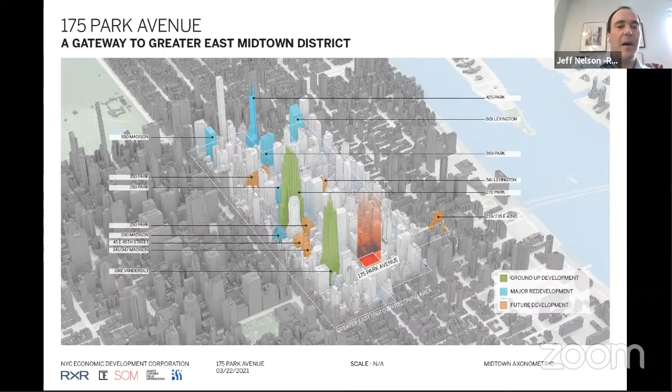On the next slide, just to touch on the history, these developments and the rezoning are really a continuation of the legacy of Terminal City, the idea that Grand Central would be a catalyst for density and growth in East Midtown and utilize the transit infrastructure and network to bring people into Manhattan's premier business district. That transit network, as you can see on the next slide, informs our approach in many ways to this project.

But you'll see how this informs our engineering and design approach, and we also took it as a real opportunity as we were approaching the site.

Looking at 42nd Street today, it's probably hard to find a location that has more untapped potential than this site. I think we all know how we got here, but just briefly, in 1980, Donald Trump reimagined the Commodore Hotel and gave us the current Grand Hyatt.

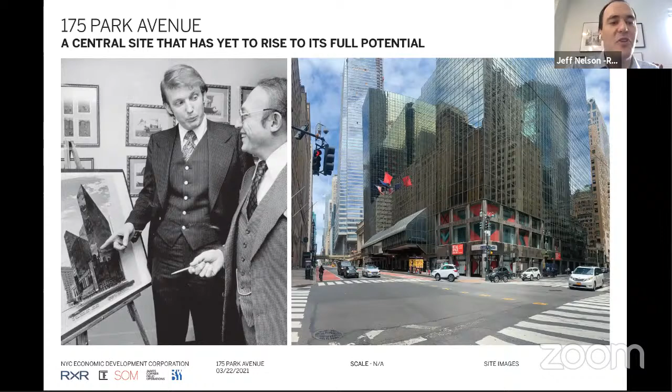The design is imposing, it's foreboding, it sits on the lot line, it cantilevers over 42nd Street, adding to that feeling of congestion, and it obscures views of Grand Central, and really has no relation to the balance of other landmarks surrounding the site.

So there's a real opportunity as we undertake this project to fix some of these interior issues as well. In short, looking at the building today, there are a lot of challenges, but there also is a lot of opportunity. So our proposed project is the demolition of the current hotel and the construction of a new mixed-use tower.

The overall program is 2.2 million zoning square feet. That's comprised of just under 2 million square feet of office space spread across 4 tiers, and then a 500-key hotel at the top of the building.

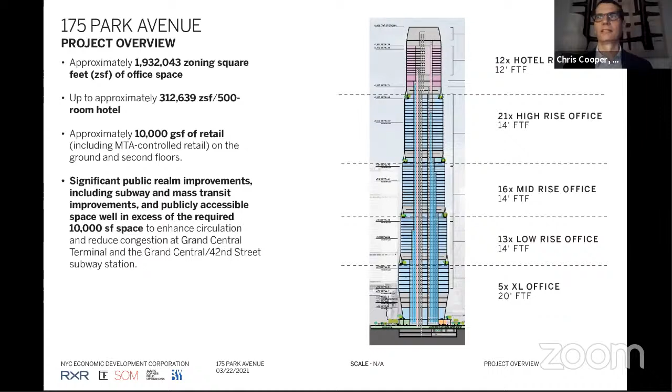Great, thank you, Jeff. As Jeff points out, our specific site enables very specific and meaningful opportunities to enhance the daily commuter experience for thousands.

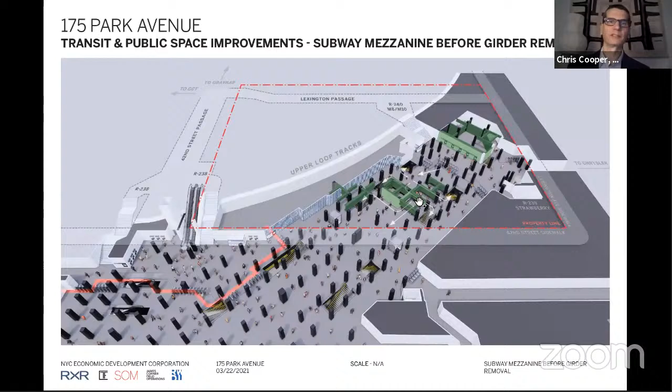As we step down to the mezzanine level, you can see that the removal of the turnstiles directly adjacent to stairs and escalators are going to dramatically open up the congested space. And then when we remove the Grand Hyatt structure above, we also remove a network of transfer girders that block the flow of the mezzanine today.

And so the result will really be a transformation of the currently challenged warren of circulation into a much more open mezzanine level.

And then from that open mezzanine level, we're creating two critical below-grade connections: one directly to the existing platforms for the Metro North Railroad, and a further connection to the shortly arriving Long Island Railroad East Side Access.

In this view of the transit hall, you can see that we're making these connections seamless to the current Grand Central Terminal experience, extending the materials, locking into the formal planning of the terminal, providing generous daylit space, and even visual connection from the corridor system up to Grand Central Terminal for much clearer orientation and even delight.

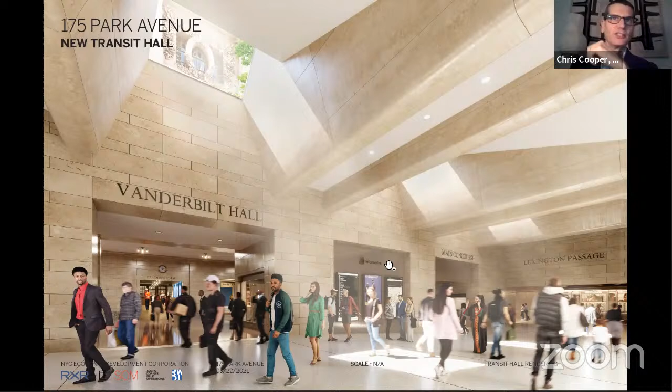So these improvements are really about a holistic approach to the terminal block. We're providing almost 50% of the street level to public realm. And they're really effective and they're possible because of our cojoined relationship to the terminal and our direct relationship to the infrastructure below the site.

So the direct relationship to the infrastructure, the direct relationship to Grand Central Terminal offers all these great enhancements, but it also is meaningful in other ways beyond the transit improvements. We recognize certainly the importance of building a new building in such proximity to a beloved New York City landmark. And this site is unique also in that it's not just adjacent to Grand Central Terminal, but it's entirely surrounded by New York City landmarks. So we believe really this elevates our project, but also puts great responsibility to build appropriately in this context.

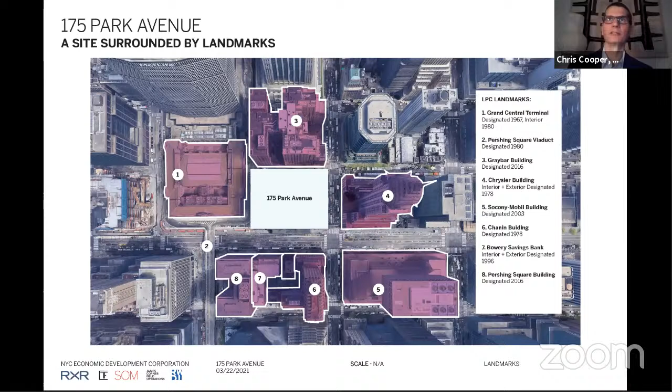So towards a goal of exceptionalism and appropriateness, we've adopted a series of design principles. The first of those is really embracing symmetry, accepting that with that comes a certain formality and dignity that's resonant with our neighbors.

Next, we adopted the classic New York City setback geometry. It addresses the sky exposure plane, but it also creates a great formal relationship to other New York City landmark towers. And it enables access to outdoor space for the users of the building, but perhaps most importantly at the base, we've aligned our first setback with the viaduct level, opening up the opportunity for a true public amenity at street level.

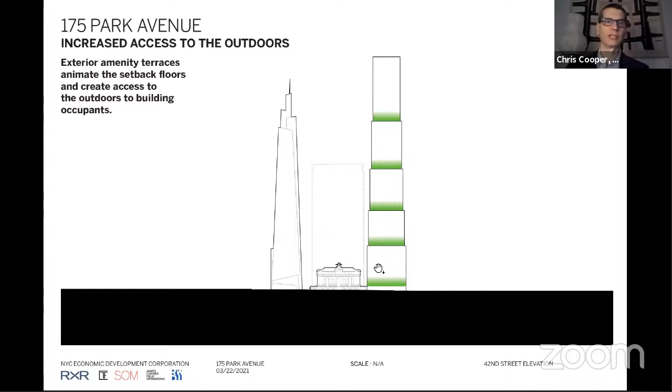And then we've taken that step geometry and draped our structure on the outside of that form. That draped structure becomes then the expression, relief, and detail for the architecture of the building, and also helps us move beyond another glass tower.

And that structural expression that becomes the articulation of the building, we gather that at the base to hit those points we talked about, the threading of the needle, really sit into the site and demonstrate the fluid flow of structural forces from top to bottom and create a base of the building. We also gather that structure at the top to create the expression of a crown.

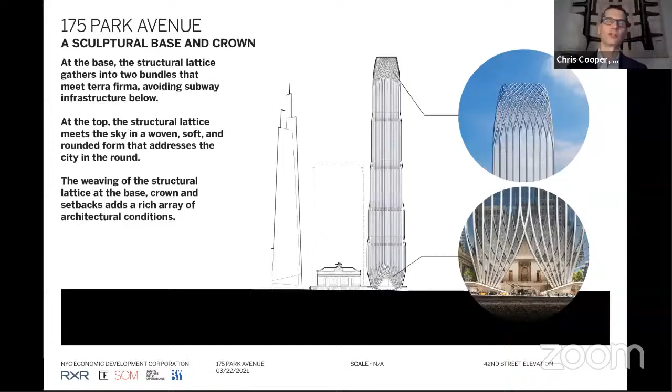So we're trying to use the expression of the building and the attributes that we're putting into the building to create an active and dynamic street level experience base, and also an active and engaging crown at the top of the building. So the premise of this really is trying to work within that tripartite approach, classic to New York City skyscrapers, of a base, tower, and crown.

The result, we believe, is a new iconic tower for New York City, one that's resonant both with New York City's Art Deco skyscraper history, but also is proudly built today and positioned to endure into the future, and acts as a gateway to the future and evolving Park Avenue corridor.

And of course, we recognize at this height, we have a responsibility, a civic responsibility, really, to stand proudly on the skyline amongst the other great New York City landmark towers. And that responsibility certainly extends down to the street level experience and how we enhance the street level experience.

And so in this elevation, we hope you begin to see this idea of a direct and intentional connection to Grand Central Terminal. We have extended the materiality and the datum and the public component of the viaduct level onto our site and created a landscape of stone that ties into the viaduct base of Grand Central Terminal, and extended that to the core of the building that relates very directly, we believe, to the scale of the Grand Central Terminal. And then atop that landscape of stone tied into the viaduct, we bring down the structure from above.

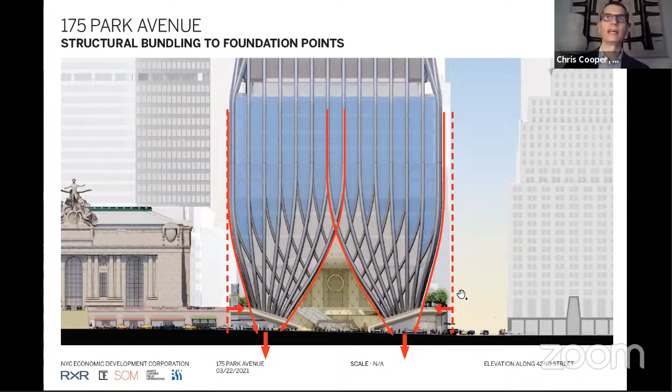And as we looked at it at a larger scale, that structure gathers at the base and plugs into the points where we're able to connect below grade between the subway tracks and platforms. It creates an expression of the structure plugging into the site, and it gives us great benefit in that we can taper the building in and create meaningful outdoor space around it.

Where we put those points of inflection and those changes in geometry are aligned directly to the landmarks on either side of us, to relate to them, but also to bring proper articulation at the scale of the street and at the base of the building.

That tapering allows suddenly public realm at the base of the building. This is such a significant attribute of the proposal, that we're able to create meaningful outdoor spaces fully encircling the building at its base.

We are primarily doing that at the viaduct level, which is also our lobby level, because our elevators do not penetrate down into the infrastructure below. So we have a new raised level at the viaduct, which is the lobby of the building, with adjacent terraces that encircle the perimeter.

That strategy of tapering at the base also allows us to incorporate sidewalk widening and increased entrance depth at each of the entrances to the subway and to the building. So there's a dramatic improvement to the flow at street level.

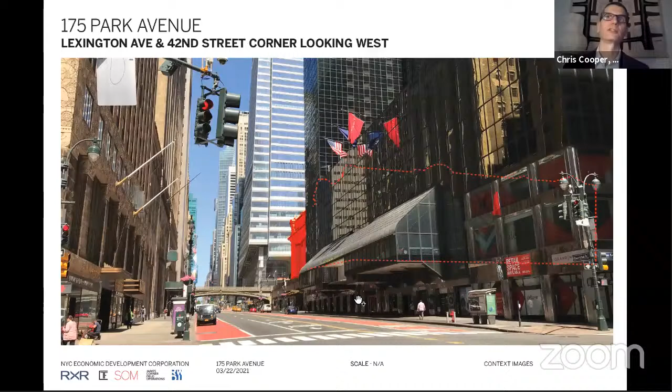This condition that exists today, which has room for improvement, is exactly the condition of an as-of-right street wall building that would replace this with a podium built to property line, which would again add to the congestion of the sidewalk and the concealing of Grand Central Terminal.

So that's what we think is so unique about this: by tapering in, by peeling in to hit those points of structure, we expose Grand Central Terminal, and we can extend the viaduct level and then invite the public up to that level.

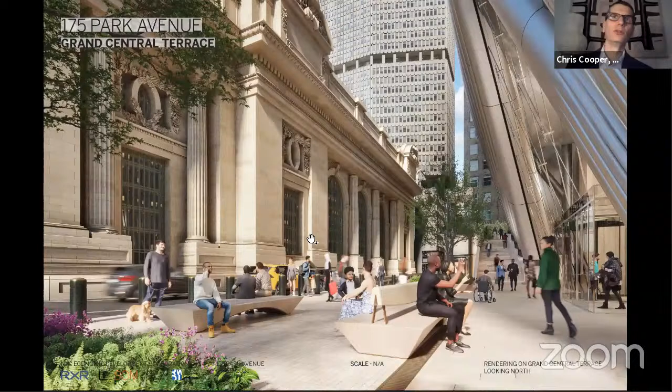Here that starts to show itself, in that for the first time we see the east facade of Grand Central Terminal as an active part of the streetscape, and we are able to see around the building and through the building to the terminal, really inviting the public up to new public spaces.

This is created space that is currently in the footprint of the existing building. The property line is just at the far edge of the bench here on the left. By tapering the building in, we're able to create meaningful outdoor space and bring the public up to see the east facade of Grand Central Terminal, which is just as grand as the south facade.

Moving around the building, we have this opportunity to create meaningful outdoor space, sunlit, with mature trees raised above the congestion of the sidewalk and street level, amongst the great New York City landmarks that surround the site.

So I want to talk a little bit about the tectonics of the base and how we arrived here and what our approach is. Diagrammatically, we've really been thinking of this as an extension of the plinth of Grand Central Terminal. As we are co-joined, we continue that, which was very much in line with the historical planning of the terminal. So we extend that materiality in the base and also in our core, which is scaled analogously to Grand Central Terminal.

And then we carve out that stone plinth to allow for the complexity of entrances and access to the subway, to Lexington Passage, to the program of the building, to the hotel and to the office. That carve also allows us to invite the public up to the viaduct level.

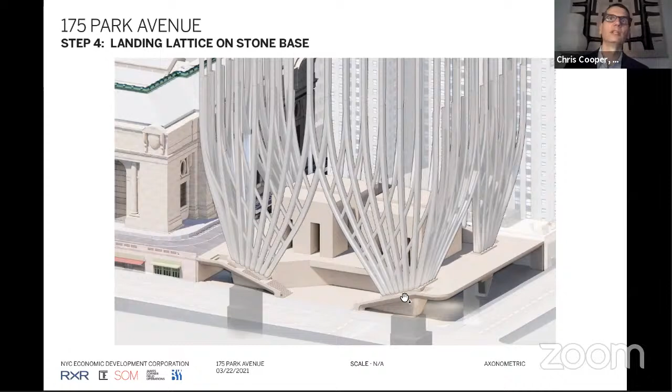Some of the specifics about what that means: we have a steel structure, an expressed steel structure, and that steel structure plugs into a concrete base. This is the transition we have to make from steel structure to foundation footing below. So there is a moment where the steel comes down, it is gathered into a concrete base.

That then sits atop the mega column that we were able to thread through the foundation below. Our approach has been to clad that in stone and to express the solidity of that base, which coincides with the points of connection for the stairs. We've taken steps to bring down the scale and texture of the columns with detailing appropriate to a pedestrian experience and to a base of a tower in New York City.

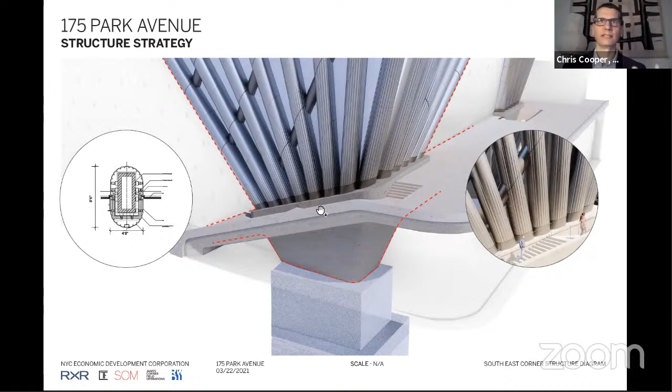And that all comes together in an image like this. You can see the condition which is unique in New York City: this idea of plugging into a raised viaduct level, but the power of inviting the public up directly adjacent to that connection, the opportunity to have this raised public space, and also to open that up at street level to maximize pedestrian sidewalk widths. There is a lot happening in a small site and small area, but it all comes together at a heroic moment like this.

As you move around the building, you start to understand the complexity of that viaduct level in relation to street entrances, in relation to public space above, and the transfer of the tower down into the base of the building.

This is an area we are very interested in. SOM has a legacy of landmark buildings with structural expression, and how one thinks about using the expression of that structure as part of the architecture. We've tried to be very intentional with how we are placing this building into the city in a way that is appropriate to New York City.

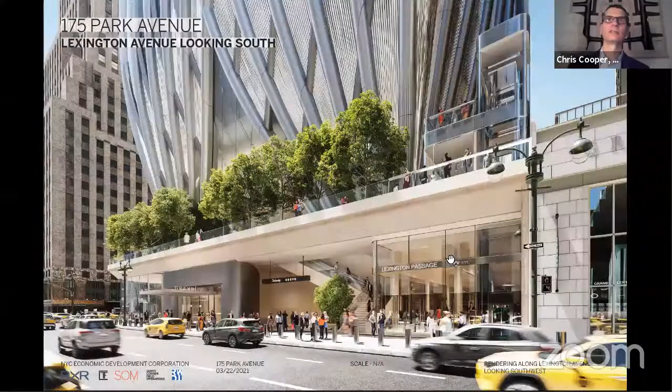Wrapping around Lexington Avenue, you continue to get a greater understanding of the benefit of the viaduct level, the invitation of the public up to that viaduct level, but also the active entrances to Grand Central, to the subway, and to the building programs below at street level.

I'll pass this on to Isabel to walk us through the details of the planning of that raised level. In this image, what we hope becomes apparent is the celebration of this section of the site, that the pedestrian experience is not just at street level, but at viaduct level, at sidewalk level, and also access to that infrastructure below grade. The idea here is to try to bring all that together and tie it into a landscape that connects to Grand Central Terminal and is the receiver for the great structure coming from above.

Great, thank you, Chris. So I will now walk you in detail through the designs of the public open spaces. To summarize again what Chris just mentioned, we envision the public open spaces to surround the four sides of the building.

The building will be encompassed by a series of three very distinct terraces. We have Chrysler Terrace to the right-hand side of the image overlooking Lexington Avenue, Graybar Terrace to the top side of the image along the north side of the building, and Grand Central Terrace along the left-hand side or west side of the building.

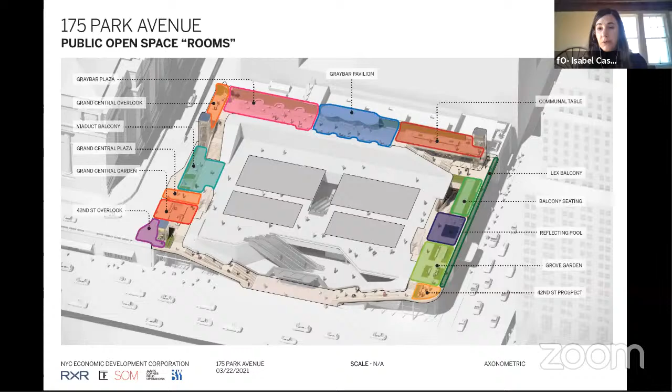These rooms will provide visitors a variety of different opportunities, ranging from social seating to seating carefully oriented to highlight key views to landmarks, movable tables and chairs that provide flexibility for those that seek sun or shade, and also fixed tables that will provide anchors throughout the terraces.

In addition to creating a variety of experiences, we also envision the terrace will be activated by a public art circuit composed of rotating temporary art located at key places along the terraces, inviting visitors up and to transit all of the public spaces of the area, ensuring there's always a level of new opportunity and interest throughout all seasons. So now I'll walk you through the designs of each one of the terraces, starting with their entry point at 42nd Street.

As Chris described, the entry is composed of a very large and generous series of twin staircases that will take visitors from 42nd Street up to the terraces. The staircases have been designed with really ample landings, so as visitors step up, they can take a moment of pause to take in the context as they rise up to the terraces.

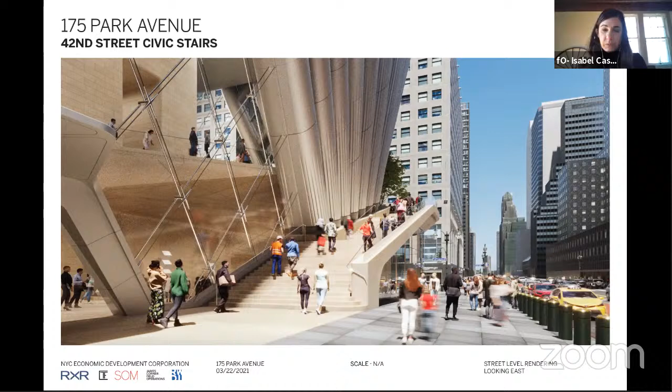The garden spaces of the terraces have also been carefully located close to the edge of the space, so the notion of seeing these garden spaces above really invites visitors from street level up to the terraces above. Starting with the first terrace, we have the Chrysler Terrace.

This terrace is the largest of all of them. It's located along Lexington Avenue. Because of its scale and exposure to a large part of the Midtown context, we envision this one as being a social space that will emphasize or take advantage of the unique views it will have to the Chrysler Building. But also because of its scale and positioning within Midtown, it will be a space anchored by a canopy of trees that will provide a sense of shelter for those that visit the terrace and also make the public space quite evident from Lexington beneath.

Looking at the renderings of the Chrysler Terrace, we're going to start walking through it from the southern corner, as it faces 42nd Street and Lexington Avenue. Here we have carefully curved the railing of the terrace to create a very inviting edge that the public can access by standing on a standing ledge with a very broad top, taking in views of this unique visual corridor. Moving further along to the north...

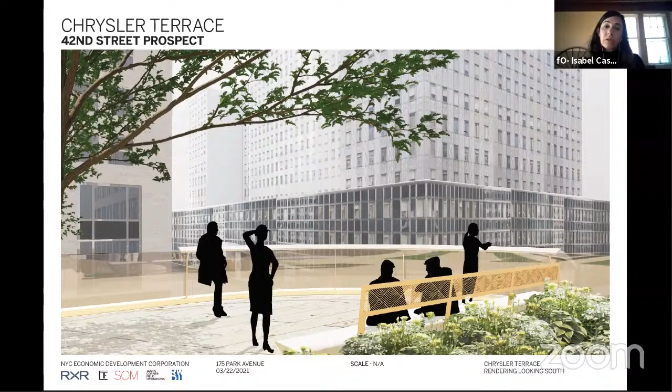Here we see the high branching tree grove that will anchor and shelter the terrace.

Interrupted in the center by a tabled water feature in alignment with the Chrysler building. Underneath the tree grove, we'll have a variety of different seating types, including, in the background, social seating with benches facing each other inboard and bound by shade gardens.

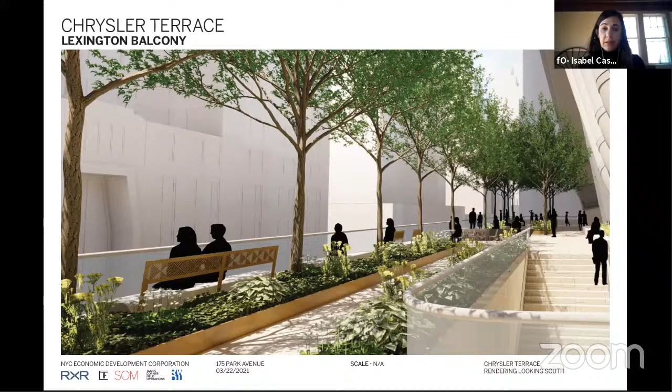Moving further to the north, we have the northernmost end of the Chrysler terrace with the staircase that will connect the subway to the terrace on the right-hand side. On the left-hand side here, we see balcony seating, where the benches have been oriented outward, taking advantage of the views down Lexington Avenue and the Chrysler building.

The northern end of the terrace will be anchored by a retail space that will hold a cafe, but also the elevators that will connect street level to Chrysler Terrace and Graybar Terrace above, which we see on this image having a balcony-like relationship to the Chrysler Terrace. All the way on the left-hand side of the image, we see the staircase that will take us up to Graybar Terrace. Graybar is located along the north side of the building, as I mentioned originally.

It is the space that will connect both terraces on either side, so we see it as a dynamic connector that will be activated with a retail space, a concession stand, but also as a space kept quite flexible, so it can accommodate large pieces of artwork as well as cultural events.

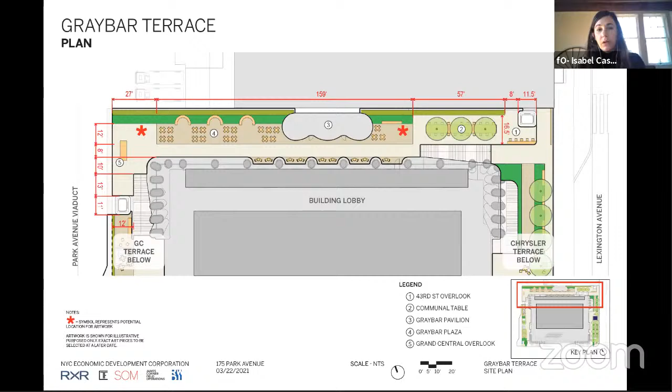We have located two permanent seating areas on either end of the terrace, east and west, where they benefit from great views to the adjacent iconic context. We envision activating the center of the terrace with a retail pavilion that will operate all year round. Looking at the renderings of this space, this is its easternmost edge overlooking Lexington Avenue and the Chrysler building, but also having that immediate direct visual relationship to the Chrysler Terrace beneath.

The center of the space will be activated with a retail pavilion that will operate year-round and will offer indoor and outdoor seating as well. The retail pavilion is intended to be quite transparent in its architecture, so it still permits clear views out to the Graybar building behind, which makes this terrace so iconic.

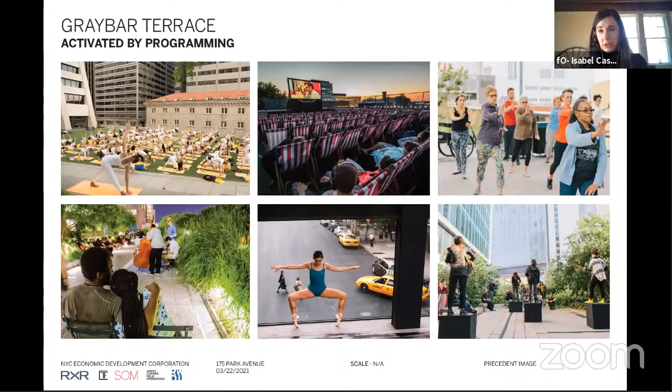The intent with this space is that it can become flexible, accommodating a variety of different programming, ranging from fitness classes during the day to other cultural events later in the afternoon or at night. Because of its flexibility, it can also accommodate different types of artwork, whether traditional sculptures or more experiential pieces, such as this one suspended from the space above.

The last terrace will be the Grand Central Terrace. As you all know now, this one is located at the same level as the Park Avenue Viaduct, overlooking the eastern facade of the Grand Central building, and it is the smallest of all the terraces. Therefore, we envision it as more of an individual space, a place of respite and lingering with smaller scale types of seating.

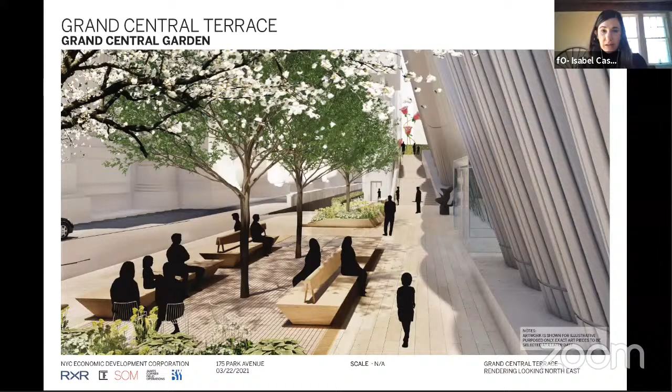Looking at the next slide, here we see the benches as they're oriented in different ways, and the entry to the building lobby behind with a flush plaza that would allow visitors clear views of the Grand Central Building.

Moving to the next slide, now our back is to the Graybar Terrace staircases. Here we see that northern space activated with movable tables and chairs and lined with a hedge that will screen views of the roadway of the viaduct.

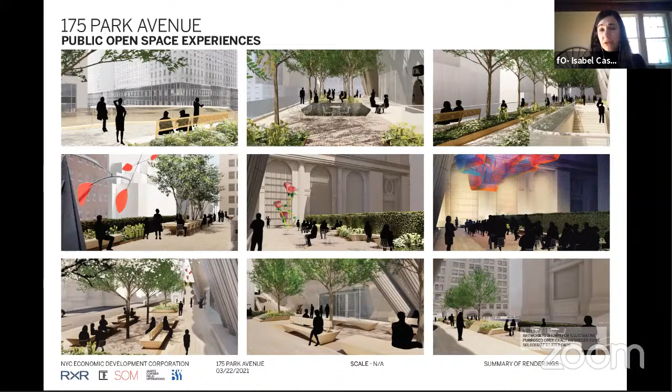In summary, we're looking for all the terraces to provide unique experiences and different types of social opportunities, all oriented towards the unique views of the context that the elevated spaces will offer, but also seeking to create a unifying design vocabulary with materials like limestone and bronze, which are persistent through the context, and textured shade planting. Lastly, artwork will add an additional layer of interest to the terraces, changing on a temporary basis to draw visitors up to this unique space within Midtown.

I will let Jeff make some concluding remarks. If someone can unmute Jeff.

Thank you very much. We're really excited about this project, and we hope that came through in the presentation. We've given you a sense of how thoughtful we've tried to be with every aspect. Just to conclude, as I said at the beginning, we really think this project can be a game changer for Midtown Manhattan. This is a site that today has so much untapped potential, and there's an opportunity to contribute to the transit, the broader public realm, and to the recovery of the city. So we're very pleased to be here and to continue our engagement with you and the commission, and are, of course, happy to answer any questions.

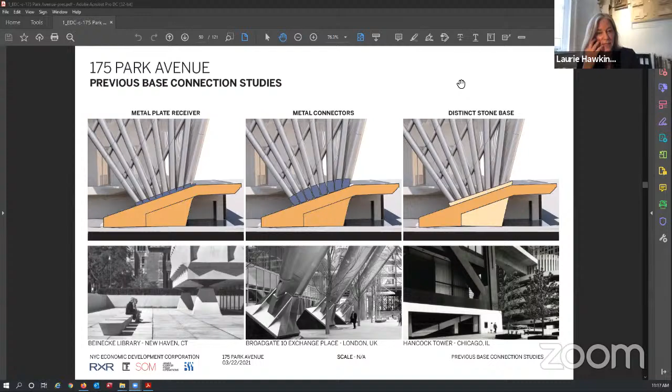I think the first two are great examples. The Hancock just kind of goes into a chunk. But on the terrace on the west side of the building, I'm trying to think of the name, but I just got a glimpse of that. I don't know what slide it was, but there was a very large plinth exposure, actually exposure of the base of the column. So you're articulating that condition where the thinness, the translation of the viaduct level becomes this thin skirt piece, whatever you want to call it, which I think can be very elegant. So two things, when it comes around, there were these three examples, which I think are great. The Beinecke is very heroic. So I guess it's in the landscape presentation where you're on that terrace, but what is that terrace called?

I think this is the Grand Central Terrace that you're referring to, on the west side. And then there's, if you keep going, there's a place where the structure exposes itself, where the columns are - this big gray bar here laying on the ground.

What are you going to do there? It seems like a question - are people supposed to sit on that? What is that piece? Maybe it's fine, maybe it just is what it is. I'm just interested in how that resolves, because you have this elegant landscape resolution, and then you have this chunk. Just wondering what's happening there.

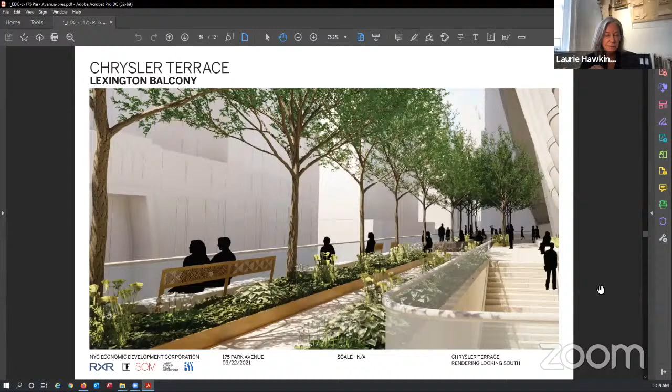I also wanted to point to this specific moment where the viaduct - that would be on the facade we looked at last time - where it meets your facade, and that point of continuity, that contrast of new and old, which I think is great. But it was done so poorly previously. So when you're on the ground looking across the street at the two facades, the viaduct level and your base coming together, obviously there's a big reveal and a control joint, but I'm interested in how that gets articulated, because that's a really important moment in the project.

Thank you. But anyway, I think it's progressing nicely. Do you want me to respond to either of those points, Laurie?

Should I pause? I think these are just elaborations on what our comments were, but the one on the Grand Central Terrace I just noticed for the first time, so I wanted to call that out. And maybe that's something you're going to look into.

That's all. Okay, I'd like to add my support to Laurie's comments. I think the presentation you guys did today was terrific. The building is definitely moving in some terrific positive directions, but particularly grateful for the views of the building from actual streetscape as opposed to semi-helicopter views. It's lovely to see that when you take people to the street, the building looks pretty damn good. So that's great, and those are relatively new, and I thank you for providing that, because that's what a lot of people will see.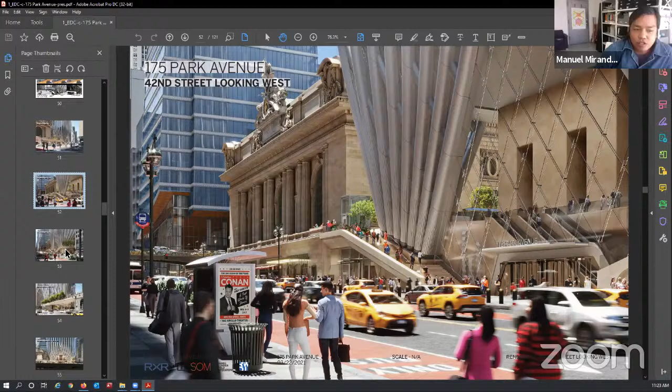I'm looking at page 52 in the presentation. I think that's a great rendering that demonstrates how this new space continues the sort of language of Grand Central, with the signage. I used to go through this space before the pandemic weekly to use Metro North, so for me this is totally welcome to see. I'm sure it'll be great benefit for everyone using that. I think in this rendering, there's a good example of how the agency signage or branding of Metro North and the signage or look of Grand Central go together well.

I did have a question about page 54. I think this is also a good rendering to study. You have the branding for the hotel, the signage for the subway system, and then the signage for Lexington Passage. I usually enter through the 42nd Street entrance, but I also sometimes enter here, and I always get the sense that this is a passageway through the existing hotel, but when I'm in this passageway, I feel like I'm in Grand Central. So my question is, when you're looking at this interface with the building, is it clear that once you enter through those doors, are you in Grand Central, or are you part of this public-private space, or part of the building? That's more of an open-ended question, and I'd be curious what your response is or how you're thinking about that. But that was just one thing I wanted to notice or highlight.

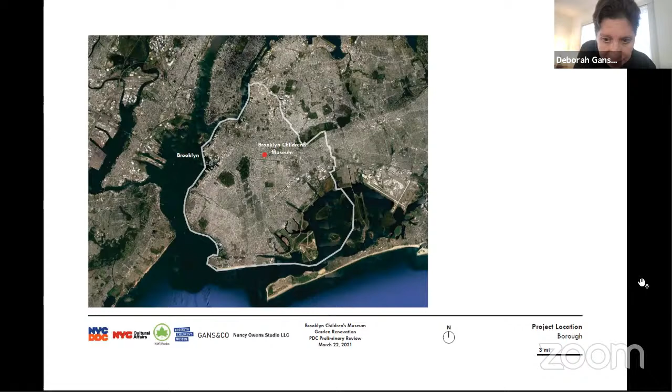Grace, I'm not controlling it, it's not advancing. Is it on full screen PDF? It's not advancing. Oh, there it goes. Here, let me see, can I move it? I don't seem to be able to move the slides, the images. Sorry about that, I went to the bathroom.

Okay, let me try and restart this share. Yeah, I think we had this issue when we practiced too. Okay, let's see. Nope, okay, well why don't I advance it for you? Okay, so can you go back, just let me, oh I wonder. Here, now it says you're controlling my screen. Why don't you try again? Try your mouse or the keyboard keys. Okay, what is this? Nope. Okay, well why don't I just do it for you, and I'll control it for the rest of the time, everyone will excuse my next steps.

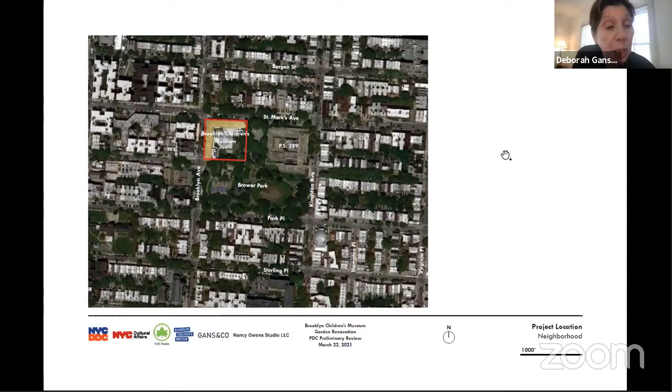So, okay, this is good, we'll start here. Our site is the green L at the rear of the yellow museum that completes the square. As Stephanie said, it hasn't been an exhibit space, but it did provide public programs as well as a garden from the late 1970s, when the first phase of the museum was opened, until 2013 when it was closed because it was unsafe, and it's been closed since then.

Our second task, and you can keep it here, thanks, is to improve this courtyard by expanding its accessible public space within a sustainable environment that will support the museum's earth science exhibits. And this is a great place to stop.

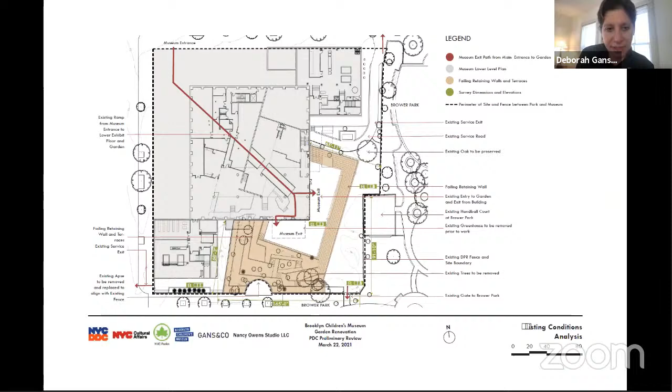So the next, please, and we can stay here for a bit. So with our collaborator from the beginning, we've collaborated with Nancy Owens Studio. We use the landscape itself as the retaining structure. We use stabilized planted slopes as our primary structural means, and they of course also provide water management.

You see here how those slopes are then traversed by accessible paths and ramps that open onto terraces. And those terraces are sometimes shaped and protected by retaining walls, which are carved into the slope.

Thanks. So this is a diagram of the primary accessible loop, circulation loop, which is in green, so that all the major exhibits are extensions of or part of this accessible loop, and they're also accessible. Then what we've done is across the garden, we've also connected them through sight lines.

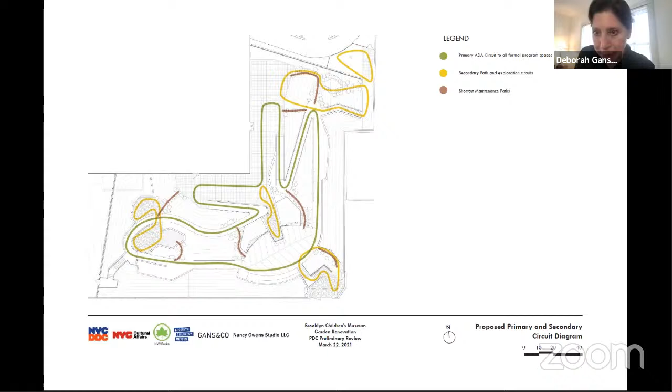You want to go to the next one? Yeah, because I think this is a very good way to see how this all works together in relationship. All these paths and places work together in relationship to the slope.

I should say that in this whole process, we spent a lot of time talking to Robin Moore, who was our consultant. He's a child's garden expert who brought us Teardrop Park and worked on that, as well as many other beloved spaces. But the thing I want to show here is also the different characters of the space, meaning on the south, which is the right, it's wider, gentler, it sponsors a path rather than a ramp that opens onto spaces to either side of it, while on the north side, which is on the left, it's much narrower. It is traversed by a windy ramp that opens onto what we call the North Slope climbing, the moraine.

And then could you go back one second, Grace? Thank you so much. So on the central terrace, the other thing I want to bring your attention to is it looks down on the crevasse, and the crevasse is an important feature because for kids who can't scramble up slopes, it's a universally accessible way to experience the dramatic section of the garden, and also a way for all the kids to really enter into a cut into the earth.

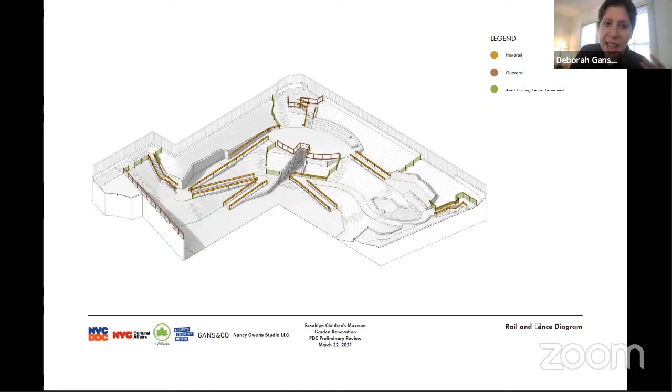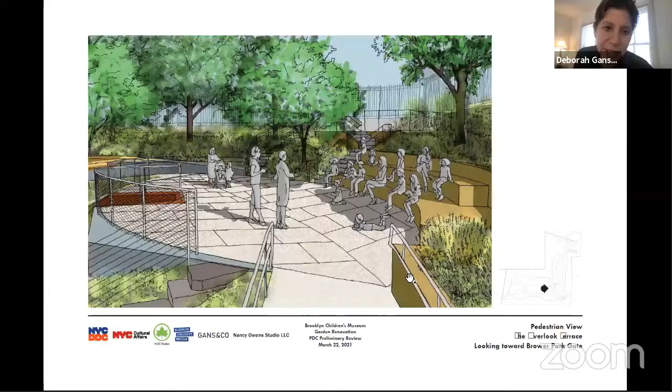And so then the next several slides, which Grace can just flip us through, are views that show how all these elements work together to do two things, which is to create an integrated retaining structure, but also simultaneously an armature for the earth science garden, which is geological and also a matter of the flora and the fauna.

And if you go to the next slide, Grace, I'm going to have Nancy Owens speak to the flora for a minute. Hi, Nancy Owens, and thank you, Deborah.

So just go back to the previous slide. I just wanted to say that we use the planting to further articulate the garden spaces and program areas where the plants masses create volume and canopies, and also create a hierarchy of scale with the trees and the understory and the ground covers.

Next, we use the plants to also create a sense of enclosure for this earth science universe. Screening out the unsightly areas such as the handball chain link fence and some of the service areas, while still allowing a visual connection between the museum garden and Brower Park.

We have used all natives here, pretty much, reflecting the diversity of New York State's different plant communities, which also support the museum's educational science programming. And they're also integral to slope stabilization. The plant species are low maintenance, primarily deciduous with some evergreen shrubs, and the planting design provides seasonal color and interest.

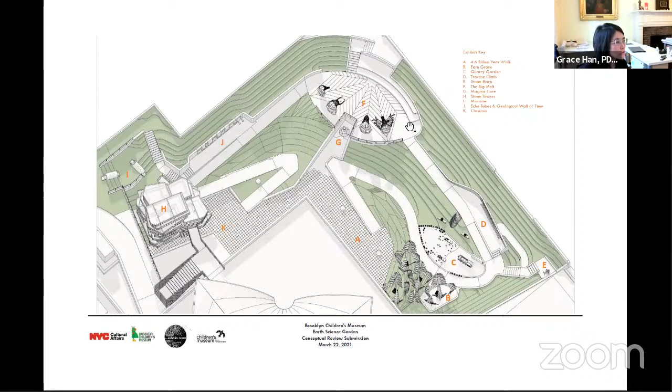All right. Hi, everyone. So it's my excellent job to be able to bring you what folks will be doing in this beautiful garden. So I'm the exhibit designer. And in the interest of time, as we get closer to lunch, I will just breeze through each of these exhibit areas, really holding back some of the pedagogical and philosophical decision-making that went into each of these things. Certainly, if you have questions about it, we can talk about that at the end.

Next, we're looking at how the exhibit components are laid out in an activity gradient to encourage self-regulation. On the left side, we have our big body, exuberant, sweaty, rambunctious play exhibits. On the right side, we have quieter, calmer areas of refuge and respite.

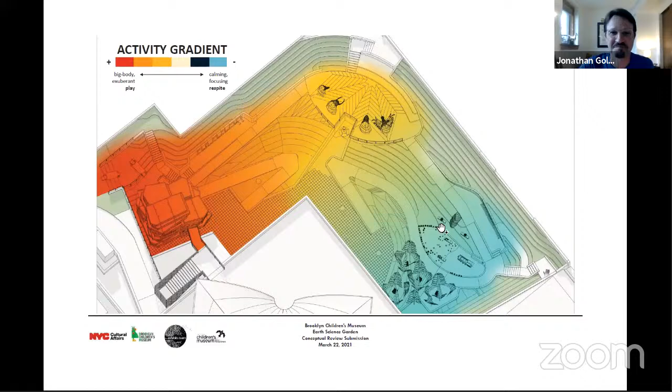Next, we're going to look at each component, beginning with the 4.6 billion year walk. This is an annotated walkway extending from the building to the geological wall of time. The length of each path segment corresponds and is proportional to the lengths of time they represent.

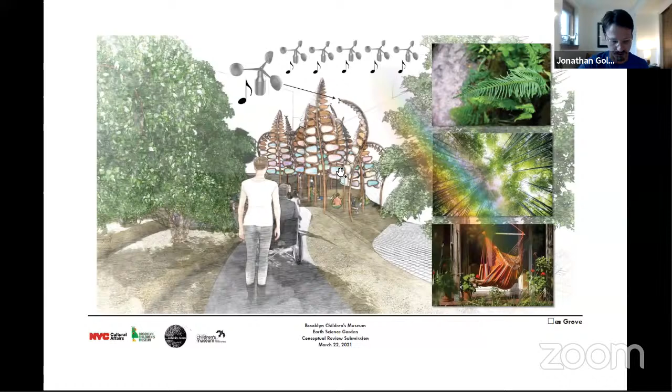Next, we're looking at the fern grove, an artistic interpretation of prehistoric megaflora which may have existed in the Brooklyn area during the last ice age. In the fern grove, you can snuggle and gently swing in hammock chairs. When the wind blows, several wind turbines will spin, producing gentle, soothing musical tones. As the sun tracks across the sky, prismatic lenses will cast rainbows all around you.

The next two exhibits are the traverse climb and the stone harp. You could think of the traverse climb like an extra wide balance beam that shares this wall, featuring adaptive handholds, easy to grab. This component is intended for our youngest climbers, as well as being a more accessible play invitation.

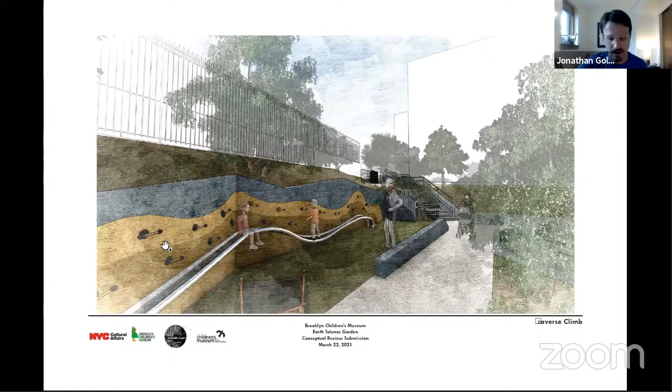At the top of this staircase, there's what looks like an otherwise mute or inert stone obelisk. But upon closer inspection, when you use the mallet, the stone harp plays these beautiful, almost mysterious musical tones.

The next exhibit is the Big Melt, which features four of Brooklyn's most famous Ice Age megafauna. Individual water geysers are situated safely within each sculpture, allowing guests to pressurize and launch the geysers skyward. The amount of water is actually pretty small, but the effect is impressive. Fogging water nozzles complete the dramatic setting, wrapping guests and the sculptures in a veil of mist.

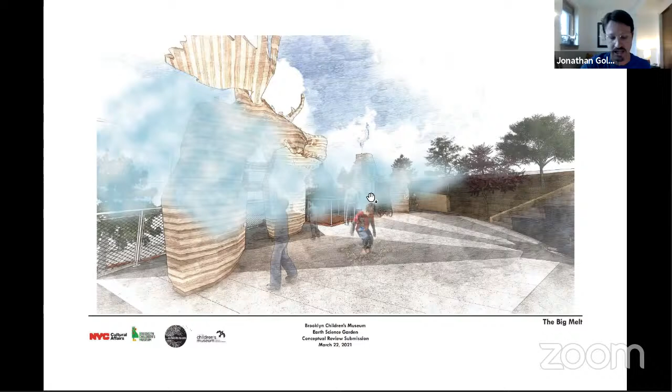Moving on to the crevasse that Deborah was talking about, where we have the magma core, a whimsical interpretation of the Earth's core. Here, guests may grab pebbles at the base of the core and drop them through a perforated sculpture. As the pebbles fall, they cascade through internal steel pins, resulting in musical notes. As an added feature, at the sculpture's base, guests can rake and broom the pebble bed. This is a super low-tech feature that we've had great success with on past projects.

Now we're moving on to the stone tower. This is an inhabitable climbing structure, and I say inhabitable because, unlike a climbing wall, guests are climbing safely within the interior of this structure. They're not strapped in with a rope or on belay. Guests climb through the structure by moving from platform to platform, such that the farthest one could fall would be a very safe 28 inches, give or take.

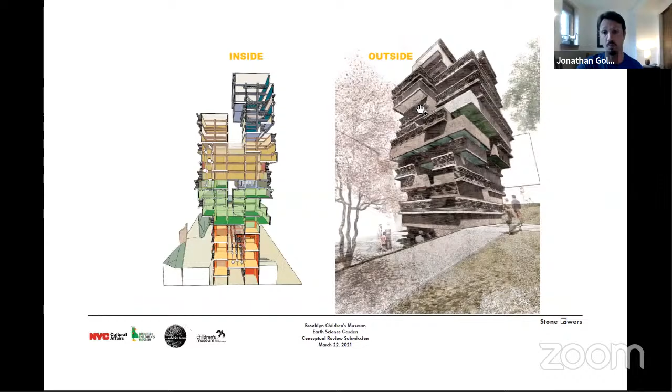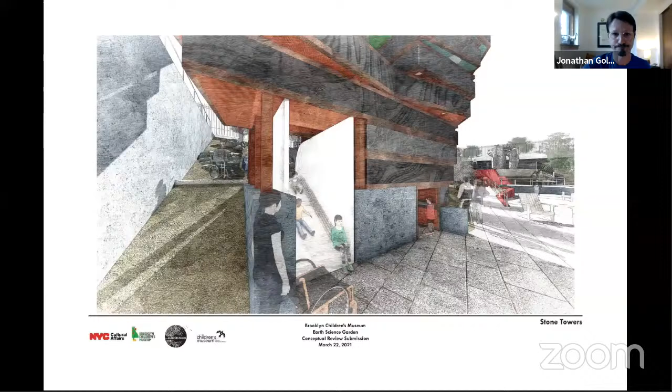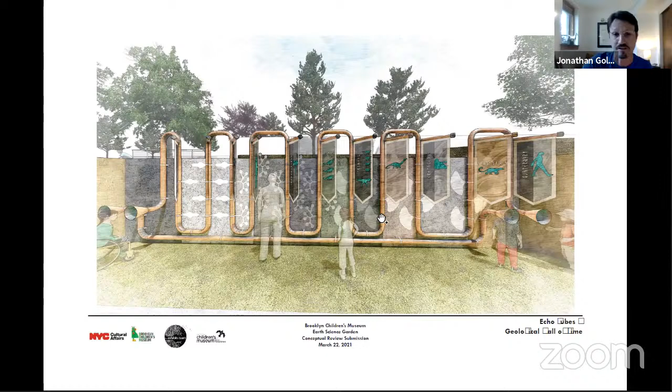demonstrates the last 650 million years of life on Earth. Lastly, in an effort to make some tacit connection between distance and time, we have two separate speaking tubes, a short one and one that's three times as long. Sound travels faster through the short one than the longer one, so the overall acoustic effect will be similar to that of an echo.

That's all the major exhibit components within the garden, and the next steps really are to take a closer look at each one and decide exactly how it's built and how it will work. Here's a nice last shot of the entire garden with all the components in context. That's it. Thanks.

Jonathan, I actually felt like I was in the garden as you described those experiences. That was really beautiful.

I guess when we were looking at the plan, you did mention that this is for slightly older kids, but I would still imagine those children are accompanied by an adult to the museum. I just wondered, it seemed to me that the amount of seating that had been there previously has been reduced. Am I reading that correctly or not?

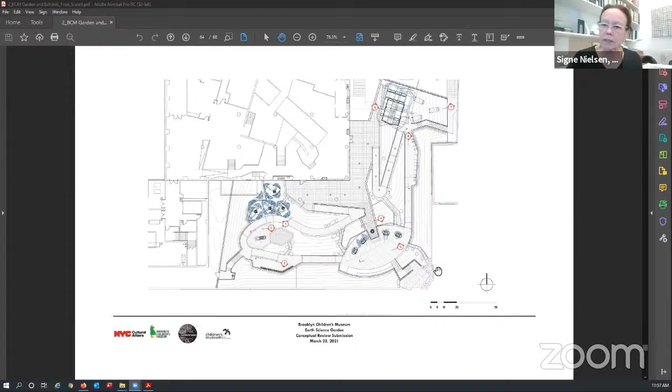So I have one more question, which is sort of a philosophical one. I think these exhibits are so exciting that I almost want it to be all kids - I kind of want the adults to just go down there, hang out on those chairs, and leave the kids alone. But philosophically, and this is probably a question for the museum too, is there any adult interpretation, or is this really something the age group you're targeting can experience without any adult intervention?

I'll give a couple pieces of context, and then Jonathan can speak to that too. The whole museum is intended to be child-directed. We've aspired throughout the museum to create a space where children are leading and the adults are following, and there does not need to be a significant amount of adult interpretation.

I think in this space there may be some interpretation needed for younger children, but really our goal is that this space is as self-directed as our other spaces. And I didn't make that up - 120 years ago, Anna Billings Gallup, our first executive director, set that as the philosophy of the museum, and it has remained so.

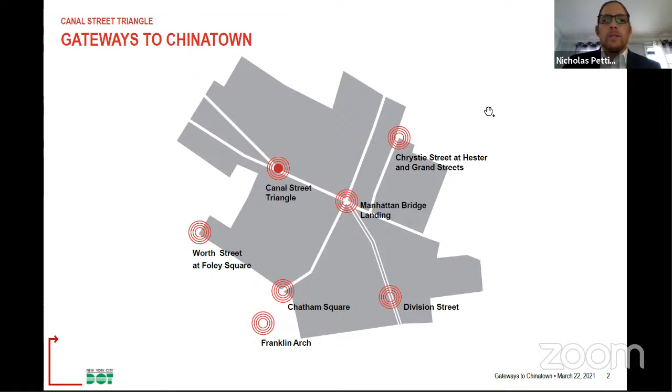Good afternoon, commissioners. My name is Nick Pettinati from the New York City Department of Transportation. I'm joined by my colleagues Neil and Karin, also from DOT. We're here today to present the preliminary design for our Canal Street Triangle as part of the Gateways to Chinatown program. There are a number of other gateways we continue to look at and work with the community on, but we're going to focus today on Canal Street.

We had last spoken with the commission in December at a conceptual level. You may recall we presented three conceptual options at that time, and really heard from the commission that option 2, what we were calling the Bosque option, was the most successful and preferred. So we've really tried to run with that design and further it, as well as take it through community reviews and quite a lot of stakeholder engagement.

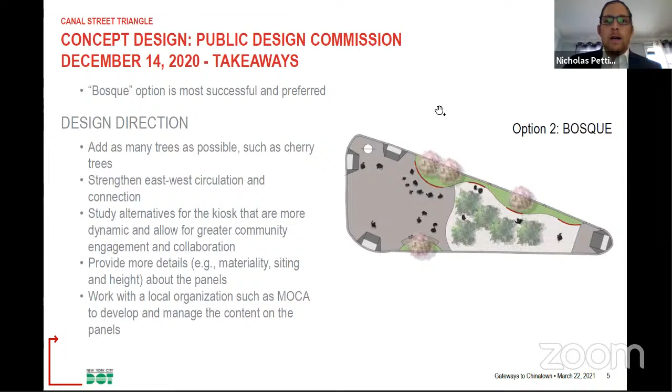The really big focus here was on preserving the existing ginkgo trees on site. I think Signe made the comment these were one of the iconic pieces along Canal Street, and they really do speak for themselves. So we've really tried to focus on making sure that those can thrive and succeed.

A number of the comments we've heard from stakeholders is really wanting a buffer from Canal Street. Obviously it's a very busy roadway, so we've continued to refine that buffer along the edge. We've added two additional ginkgo trees here to fill out that bosque. And then around the existing ginkgo trees, we're looking at creating smaller circular tree pits at three-foot diameter with silvacells below a permeable pavement surface. The goal is to make sure those trees have as robust a growing environment as possible, while still allowing for pedestrian circulation through and amongst them.

We think this is really one of the key design moves to facilitate east-west circulation through the space. Then we get to the wider part of the triangle. This is really more of the active side of it, where we imagine more of the tour groups, smaller group gatherings, and performances taking place. This again still allows for that circulation to move through the space.

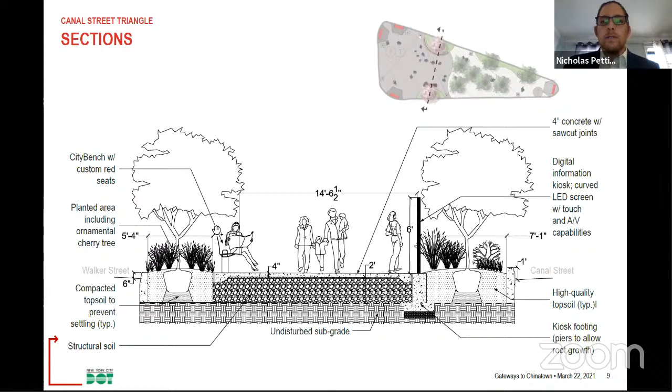Giving folks a bit more detail now that we've gotten into the weeds — this is a section cut through the larger space. You can see the two planting beds that flank either side of the triangle. We're looking at standard concrete sidewalk here, but underneath would be structural soil, providing additional volume for the trees to grow. We have that buffer along Canal Street as well as Walker, seating with the city bench, and the digital information kiosk here on the right.

We had an on-site visit with the Parks Department in January. It was one of the coldest days of the year, but we got them out there, and I think at a conceptual level they're supportive of this approach. Following this hearing, we'll engage them in their more formal review and approval process. But we think we're on the right track in terms of balancing tree health and preservation, adding new trees to the site, and preserving circulation.

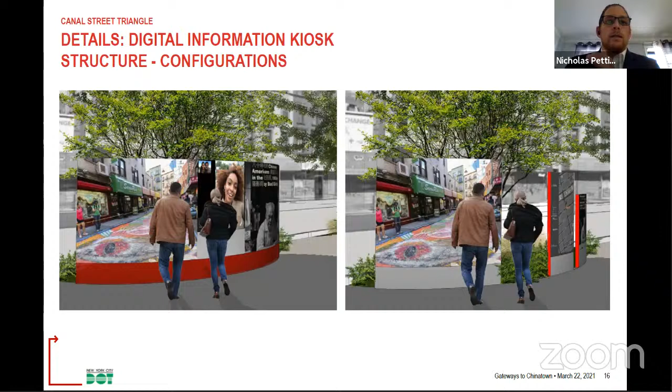As I mentioned earlier, we're still thinking about what the configuration of this screen or screens looks like. There are pros and cons to both - the visual impact of a larger monolithic structure compared to breaking it up, from a maintenance perspective and also a potential content and programming perspective. Having multiple screens also allows some visibility through the site to the plantings and to Canal Street. I think we're happy to have this discussion in more detail, I don't want to dwell on it too much here. DOT's preference is leaning towards the multiple screen configuration, just because from our discussion with product vendors, as well as overall potential for maintenance and programming opportunities, we see that as slightly more preferable - but both definitely have their merit.

We've also been spending a lot of time thinking through what the content of these will look like, and this breaks into three main buckets. I want to be very clear that in no way are we expecting this amenity to support advertising. This is designed and will be regulated by DOT as an amenity structure intended for neighborhood programming and content. That said, we recognize that it's going to take funding to maintain this type of infrastructure. So we have similar examples where we look at a sponsorship model, where a company can provide financial support and be allowed to put their name or logo on the structure, restricted to no more than 10% of the total area. Given the potential for rotating programming and content, particularly associated with art or cultural exhibits, there may be an opportunity for sponsorship of those exhibits, similar to how a museum might operate - but that's still very much up for discussion. Our goal from the DOT perspective is to make sure the infrastructure we're putting out there is ultimately sustainable, can be maintained, and can be supported by the local partner.

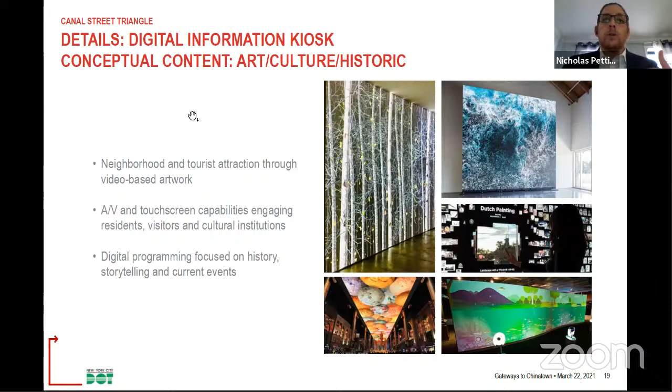So we're excited about this development. Obviously we recognize there's a lot that goes into this. We're happy to discuss it in much more detail, but we do see this as a natural evolution in this space, and something that can really deliver on what we heard from the community as well as the commission at the conceptual level.

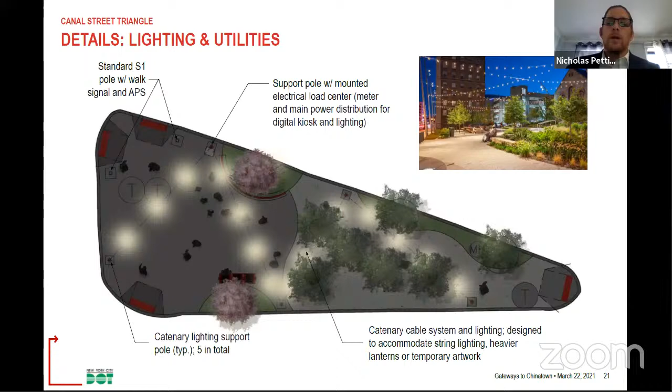Lighting is obviously a key aspect of this site. Looking at the catenary system, I think a simple string light will be the baseline proposal, and having that run through the site will be a really nice nighttime effect, particularly in concert with the trees. But there's also the opportunity to do more custom light features on a rotating basis. There's obviously a huge number of examples of different kinds of lanterns already expressed in the neighborhood, and how that can evolve is also very exciting in our minds.

This just gets at some of the details. We've been looking at a number of manufacturers and vendors that specialize in the cable system needed to support not just the string lights, but also heavier pieces of infrastructure. Ultimately, in the bottom right, we're trying to be cognizant about what the utility infrastructure will look like on site. We'll need an electric box that houses a meter so the electricity on site can be paid for, and we're looking right now at mounting that on one of the catenary poles so we're not taking up any planting space or valuable circulation space.

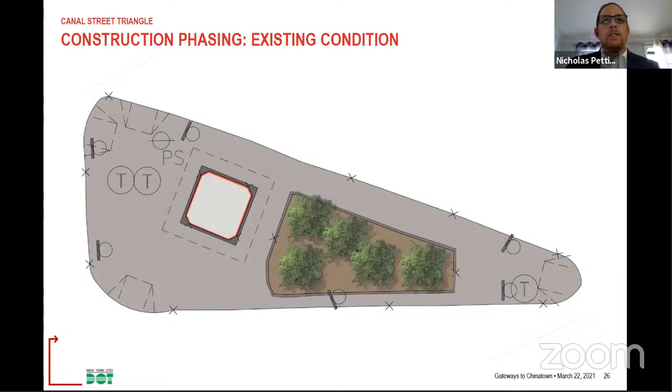So we're trying to be cognizant of all the different scenarios. I think we're confident that we will be able to get the full funding we need, but if we can't, we do think there is a way to phase this.

We could deliver some of the circulation improvements on the eastern part of the triangle with the permeable pavement, preserving the trees, introducing the buffer, even introducing the first part of the catenary lighting system while preserving the existing kiosk. Given there's been a lot of discussion in the community about the important functions that provides, this is certainly not ideal from our perspective, but we think it is a workable first phase.

We're very pleased with how this design has evolved, particularly given some of the contentiousness we saw with the community and the previous proposal.

We were able to secure unanimous approval from Community Board 3, which was very exciting. We received very nice comments from Community Board 1, and we've continued to have very productive discussions with the Chinatown Partnership, who will ultimately be our partner in maintaining this space, as well as the cultural institutions. That was one of the recommendations coming out from December.

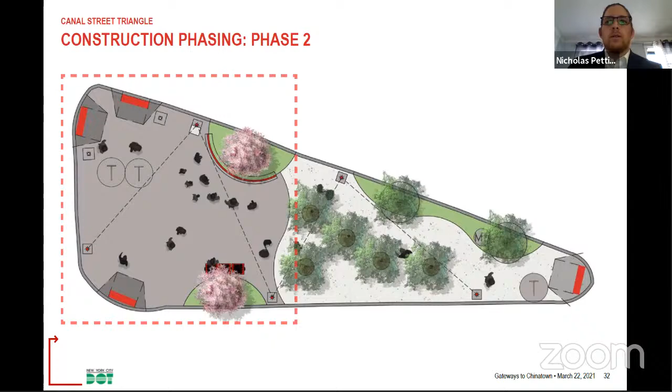So with that, happy to answer any questions, or if there's any public testimony, happy to address that as well.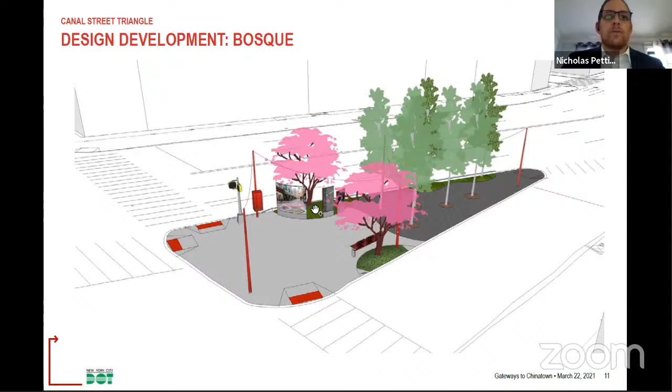Yeah, no, Commissioner, I think those are all fair points. I will say, from the equipment perspective, we are thinking that a majority of the electric and utility hookups will actually come into this box that's located on the pole. And then the equipment for supporting the screens themselves will be mostly in the base, so there won't necessarily be a huge impact there. But again, that's something that as we get into the further detailing of that, we will be paying very close attention to.

We are trying to envision the view coming across here as the screens themselves being mostly screened by the planting, and that experience being something that you have. And that's one of the other reasons why we liked the multiple screen setup, is it does allow that sight line through to the actual triangle behind, and sort of breaks up the amount of space that might be attractive to undesirable uses, whether it be vandalism, graffiti, yada yada. But we are trying to pay very close attention to that.

And certainly from a technology perspective, I think we've seen products that allow for these kinds of dimensions, but that's definitely one of the things we're trying to be very mindful of. On the brightness question, I think we are looking more at LCD screen technology as opposed to LED. That's something that evolved fairly recently after more conversations with vendors. Most of the LCD products we've seen have the ability to control that level of brightness. We would imagine it would be very low at early morning hours where you don't have a lot of traffic, so there's an ability for it to be variable. And then, obviously, the content management piece is going to be really key. We certainly understand that aspect and are working that through.

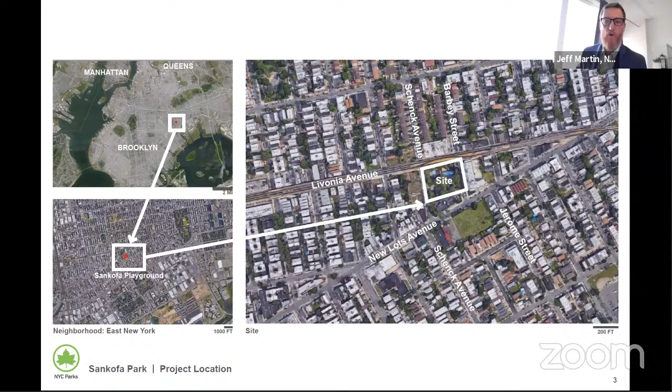The site is located in the New Lots section of Brooklyn, just south of Livonia Avenue, between Schenck and Barbey. I'll skip through some of these site analysis slides pretty quickly, but we're out of the flood zone, out of an MS4 area, and mostly surrounded by one- and two-family residential, with a library just to the south of our site - the New Lots Public Library. We've been working closely with them as they're also going through a renovation in the area, so we're working closely with them to create this cultural hub, an area that would be connected. Both spaces would be connected as they share the same lot.

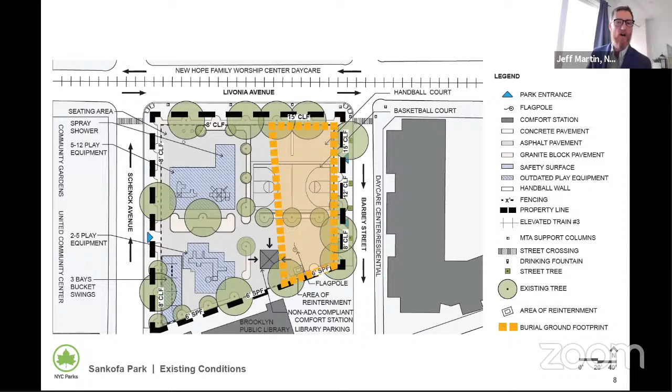You can see the neighborhood context - there are a few other active recreation parks and playgrounds around. And landing here on our existing conditions, you can see the playground and the basketball court, the handball court, as they exist now, and the layout of those features within the playground. You can see the portion there in yellow, which is the historic burial ground that cuts up through our site. I'll get to more info on that in a minute, but just keep in mind that the eastern edge of our site is where the burial ground was. The western edge was historically a school, and again I'll get to this in a moment, but it was a school and a playground throughout the use of this site.

So moving on to some pictures, here's a view into the park. You can see kind of the condition of the park. It's not so great.

Looking in and moving through the site, there's the comfort station with the play equipment to the south, the 2 to 5 play equipment and swings, and the 5 to 12 play equipment. You can see the 3 train running above on Livonia Avenue.

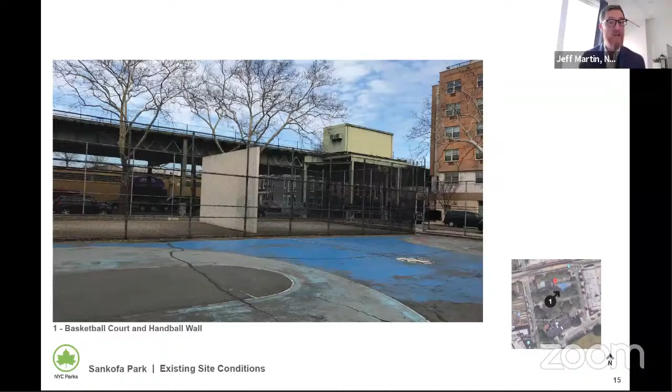Moving in a little bit more, the spray shower area is surrounded by some seating. This is the area where the historic burial ground is underneath. You can see the handball wall and the basketball court here, and then the seating area to the south end, the southeast end of the site, which sits above the burial ground as well.

Here's the comfort station, located just outside of the extents of the burial ground.

And the reinterment marker. During our archaeological research, we did discover some bone fragments on site, confirming the use of this as a burial ground. In 2019, along with the community, we reinterred these human remains back into the site, into a test pit area that we dug up during the archaeological work. Here you can see the reinterment marker in picture 2 as it exists today.

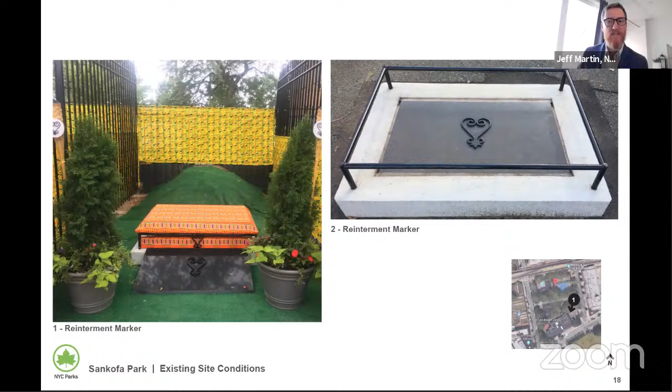You can see the location of that within the site. We chose this area specifically because it's one of the test pits that was dug during the archaeological excavation. We did not want to excavate any other areas within the site, or discover any other bone fragments. This site, over the years, we didn't find any intact burials, so any excavation that happens here has the possibility of finding human remains in the form of fragments, mostly.

Getting into a little bit of the site history. Dating back to the 17th century, this lot itself was a public space. There was a school on the western end of the site, and a cemetery on the eastern end. One thing I want to note is across Livonia Avenue, the Dutch Reformed Church and its cemetery still exists today, just south of New Lots Avenue. This cemetery is where the remains of those early Dutch settlers were buried, and that still remains.

The historic cemetery, which stretches north from New Lots past Livonia Avenue and intersects through a portion of our site, was mainly used as a burial ground for free and enslaved peoples of West African descent.

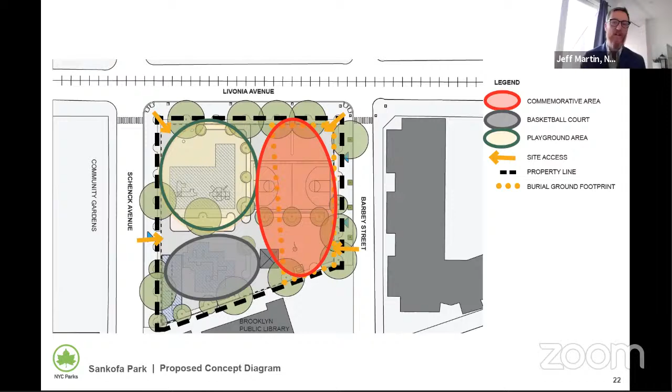In working with the community, other cultural experts, and the archaeologists, we really tried to drive down on some concepts that could act as a way to honor those people who were buried there. We really wanted these concepts to carry out throughout the site, again, as a way to commemorate those who were buried there.

For example, a griot is a West African orator who passes down the history of the peoples through spoken and sung word. We use the griot as a concept to define an education space, and you'll see that here in a minute. We also use some other traditional West African cloths as a way to define physical spaces within the site, some angles and some concentric circles.

Moving on to the schematic plan, you can see the playground with the swings is moved over to the western edge of the site, and the basketball court moved from where the burial ground was over to the southwest portion of the site. Where the burial ground was is now a commemorative area featuring two distinct but connected areas, a more passive area highlighted by an oval lawn, and an education area meant to be used for education and other community gatherings.

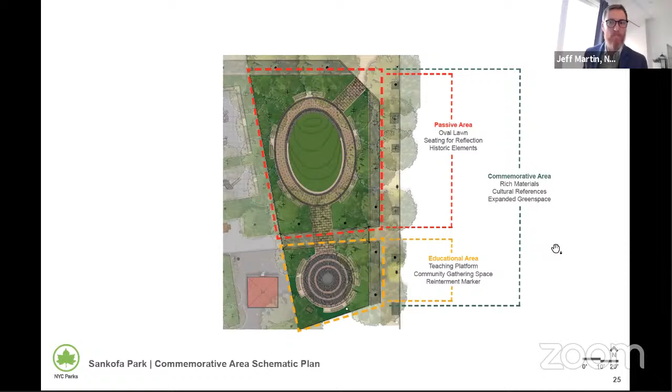Just a quick view of what that education area would look like, with the reinterment marker raised and turned towards the griot stone.

Some other defining site elements are a vegetated buffer, which would create that park-like atmosphere and buffer between the passive, commemorative area and the active recreation area. The concentric circular granite pavers are meant to capture that West African cloth. The griot stone in the middle harkens back to the West African poet and storyteller, and the materiality of the griot stone and the reinterment marker shows how important these pieces are within this site.

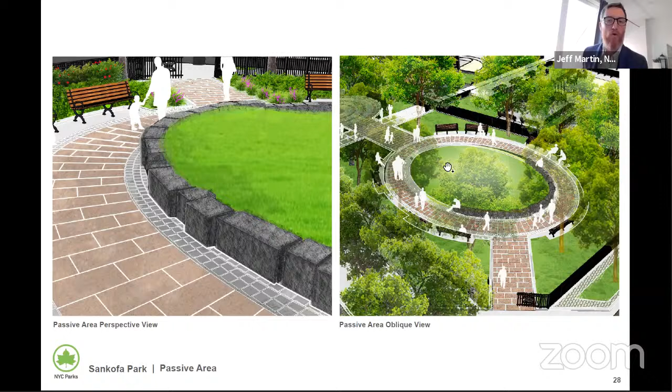Moving north to the passive area, this is defined by an oval lawn with seating around it. The slope of the lawn is meant to mimic the existing and historic topography of the site, which sloped up from south to north. So as you made your way from New Lots up to Livonia, there was a slope up, and that's the same thing the lawn will do.

We used granite throughout, including a granite wall around it, which mimics the materiality that many of the people buried here used to build the city and the New Lots area. And again, the granite pavers are in concentric circles around the defining features.

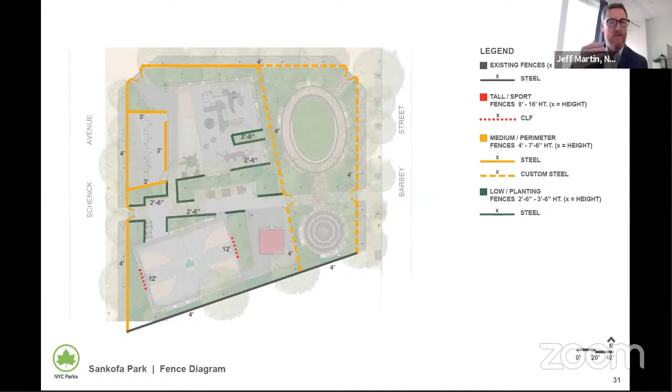Throughout the site, we're going to lower the fences down to 4 feet to get a better view into the site, again to create a more park-like atmosphere. It'll be all standard fencing with the exception of a few symbols worked into it. For example, we have the Adinkra symbol for justice along the top rail of our fence. We worked closely with the community to choose these 4 symbols, which are part of the Adinkra alphabet, a culture within the West African community.

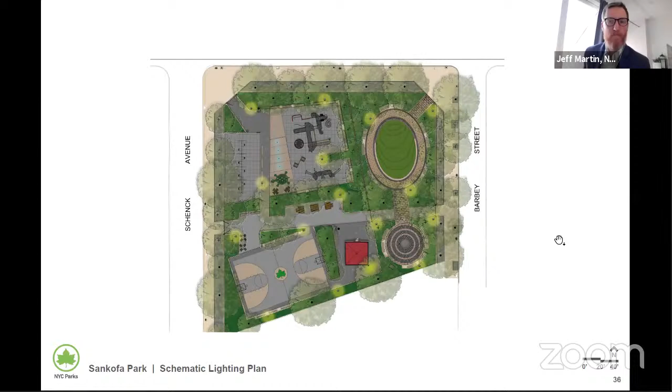We're going to use our standard lighting plan. We're working closely with DOT to develop this, but we are introducing lighting to the site through standard poles. Our other site furnishings will remain standard. We're going to add a drinking fountain to the comfort station. Materiality here is muted, darker colors, natural colors, and we're continuing that throughout the palette of everything we're using on site.

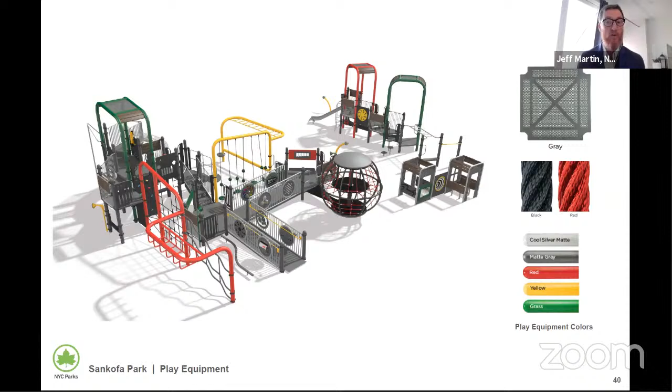One area where we've chosen to pop our colors a little bit in a respectful way is in the play equipment. This play equipment is fun, with lots of ramps going up to different play features. The colors are again black, grays, muted browns, but the community had a desire to introduce the colors red, yellow, and green into the site, which are the colors of the Pan-African flag.

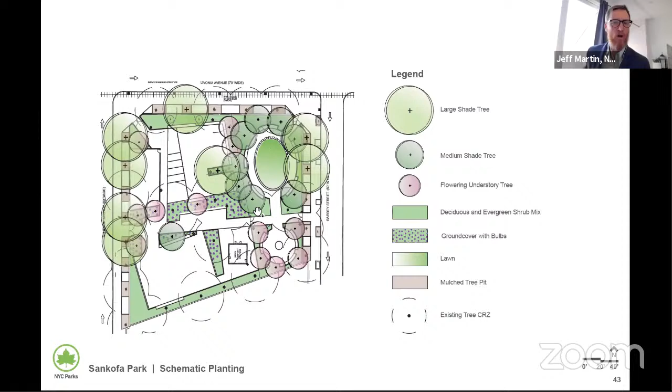Schematic planting shows that canopy of trees surrounding the oval lawn and around the education area. And throughout, we chose a palette of easy to maintain, fragrant, hardy shrubs and perennials.